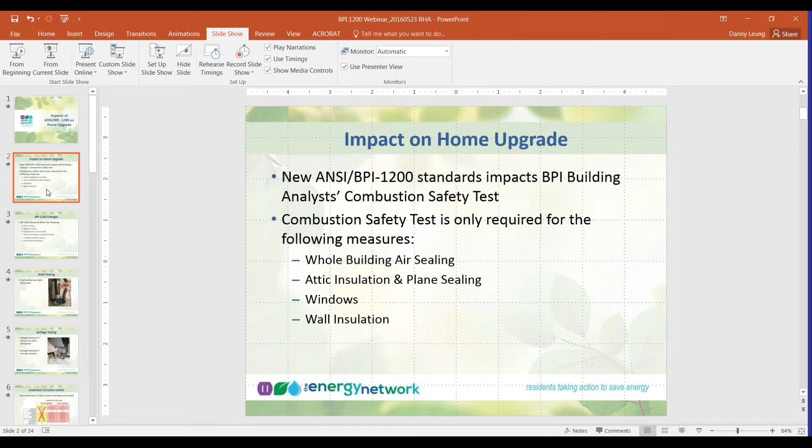So, to get started, the new ANSI/BPI 1200 standards came into effect this year. The standards really only impact the BPI building analyst combustion safety test, and as you know, our program is based off of testing by measure.

Basically, in our program, combustion safety testing from a BPI building analyst is only required when applying for whole building air sealing, attic insulation and plane sealing, windows, and wall insulation. So if you do any of these measures, this is when these standards take effect.

If you do anything like an HVAC replacement only, these standards won't affect your testing, because you're not required to do combustion safety testing when you do an HVAC replacement.

So I guess right now I will hand it off to Neil, and he will go over all the changes.

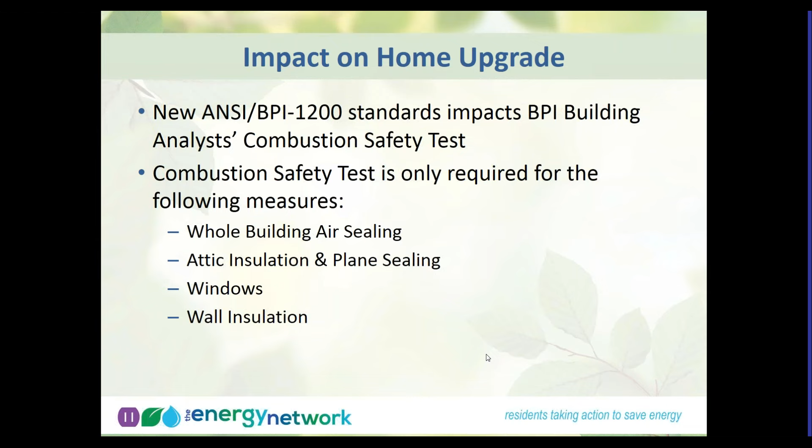As you know, BPI 1200 became effective in January of this year, and the program is now finalizing our adoption of those standards. And as Danny said, this coordinates with the test-by-measure features of the program.

When those combustion safety changes take effect, these are the tests actually affected by BPI 1200: draft testing, spillage, undiluted carbon monoxide action levels change, and worst case depressurization testing actually goes away. We'll go over each of these individually. Fireplace damper clamps are now required, and today we're going to spend most of our time on new mechanical ventilation calculations.

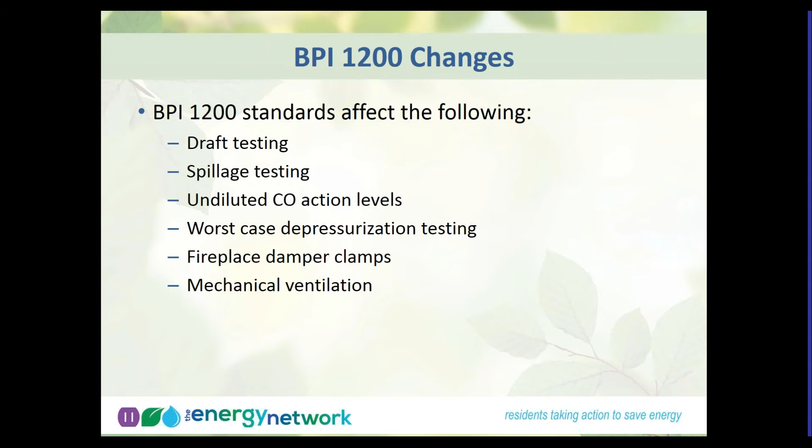Draft testing has been eliminated in the 1200 standards. We're not seeing a lot of draft testing in the field now due to the prevalence of direct vent appliances and B vents, and there's been some lack of clarity on drilling or not drilling B vents. So draft testing has been eliminated, and the standards really rely on spillage testing to adequately test whether appliances are venting properly.

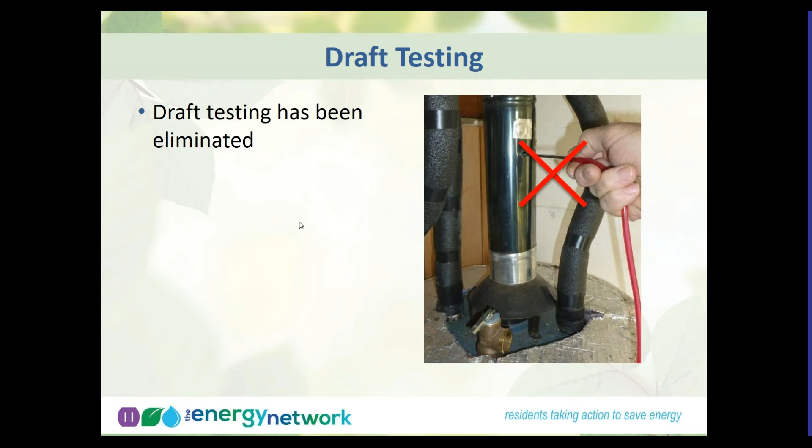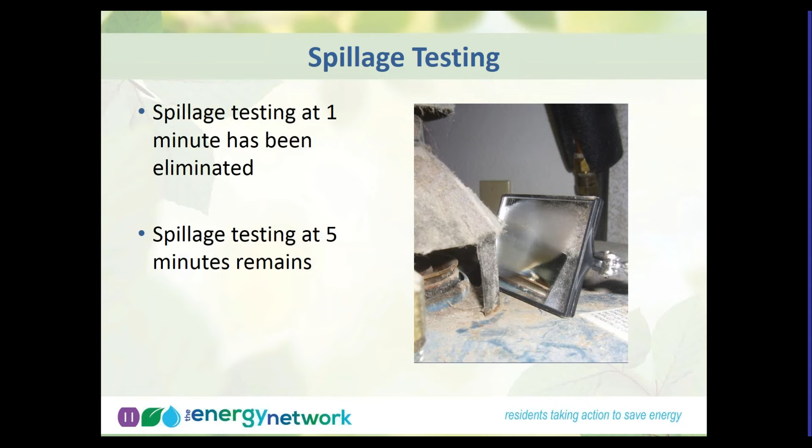Spillage testing at 1 minute has been eliminated. The program is adopting the standard for 5 minutes. It's more of a steady state test for the appliance, and simplifies matters a little bit out in the field, eliminating the 1 minute test.

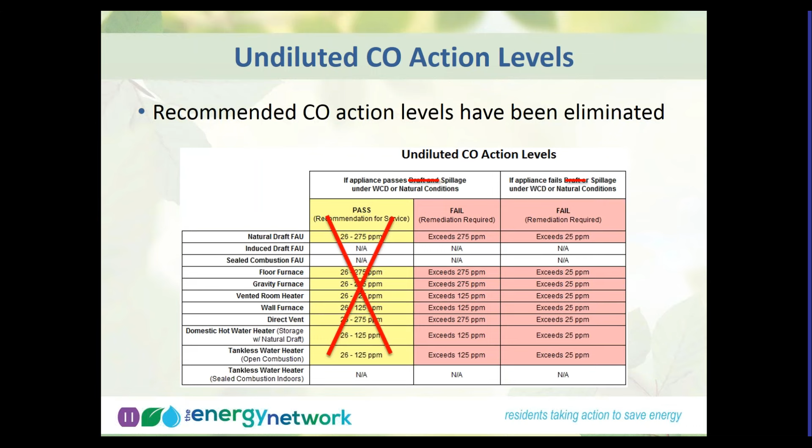For undiluted carbon monoxide action levels, the recommended action levels have been eliminated. These action levels used to be based on whether draft and/or spillage failed or passed under worst case or natural conditions. Now that we're not testing for draft, these action levels take effect based on spillage only. As you can see from this chart, the actual action levels themselves have not changed, it's just the recommendation for service that has gone away.

Worst case depressurization limits and worst case depressurization testing have also been eliminated. They found, I think in a Lawrence Berkeley lab study, that these limits were somewhat arbitrary for different types of appliances in different conditions, so they did away with the limits altogether. Again, spillage is the important test here to tell if an appliance is adequately venting.

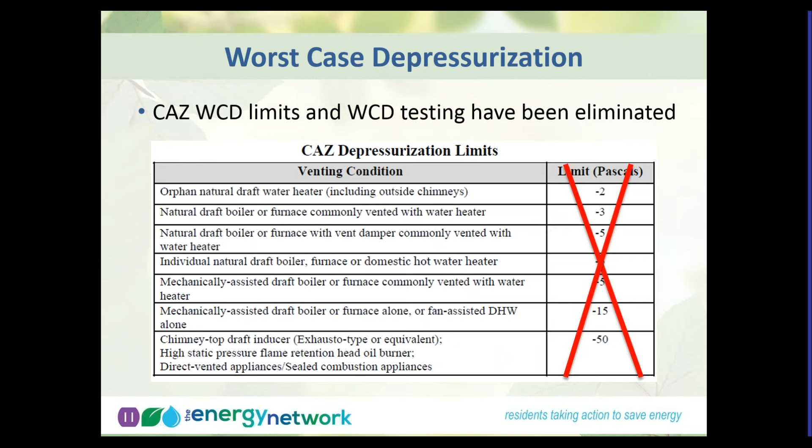It's important to note that worst case depressurization setup is still required for open combustion appliances, required for appliance ambient carbon monoxide testing, and required for undiluted carbon monoxide testing. The worst case depressurization limits and tests have gone away, but the setup is still required for these other tests.

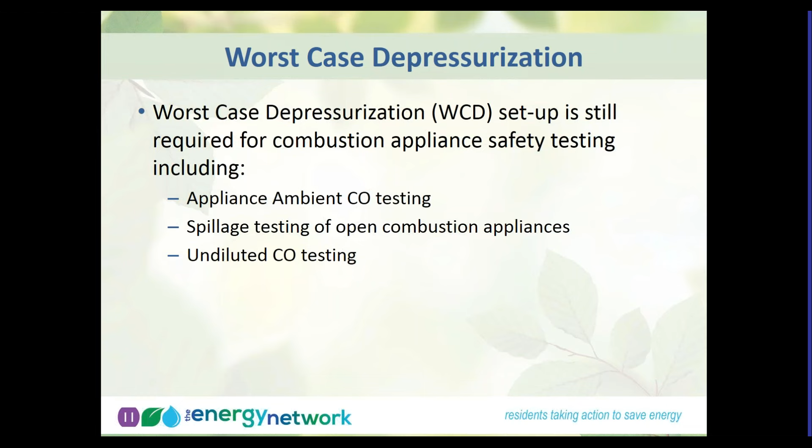This is a new rule that's come into effect with the standards, and it requires the installation of fireplace damper clamps on gas inserts and fireplaces. These are for gas fireplaces and gas-fueled appliances only, and it's an indoor air quality and safety measure, preventing the accidental use of one of these appliances with the damper fully closed.

Did we skip a slide here, Danny? Sorry.

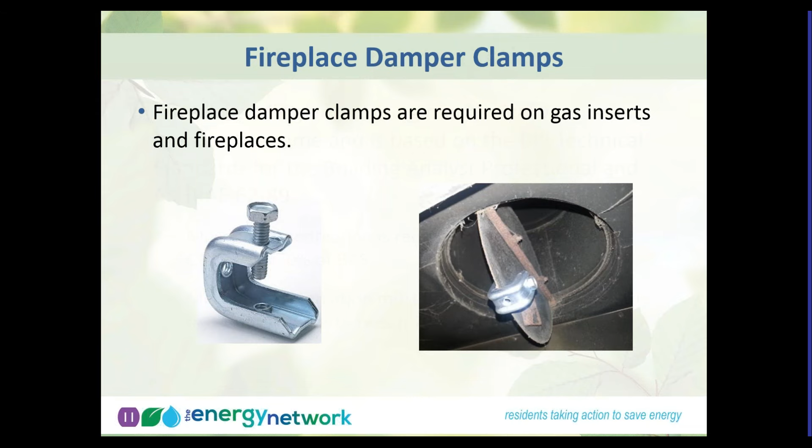Most of the rest of the time this morning is going to be spent on mechanical ventilation. The trigger for mechanical ventilation remains the same as in the old BPI standard, where a blower door test result less than 70% of BAS triggers the requirement for installed mechanical ventilation. The recommendation for installation happens when the blower door test result is between 70% and 100% of BAS. This is the ASHRAE 62-89 standard.

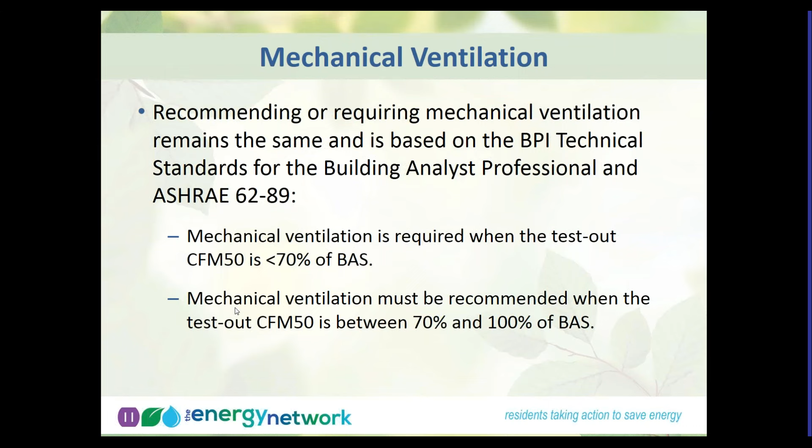The actual calculation of the amount of mechanical ventilation required for a house is based on ASHRAE 62.2-2013, and that's where some of the complications come in. 62.2-2013 has a series of calculations that are a bit complicated, but the program is providing a calculator that allows you to just enter a few numbers, a few more than you were doing previously with the 62-89 standard. I'd like to review what those calculations are based on, and then we'll do a review of the calculator.

This calculator is necessary for anyone who's doing whole building air sealing. It's going to be a required document to be submitted with your other documents.

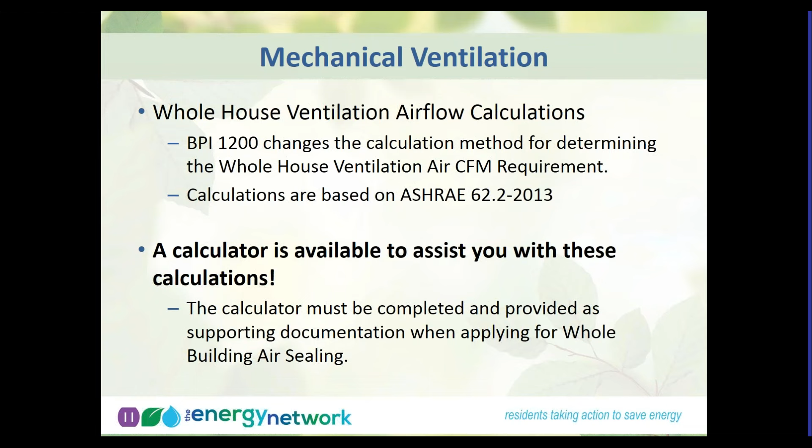Basically, there are three calculations to come up with the airflow required for a home. The first, initial ventilation airflow, is based on conditioned floor area, number of bedrooms, and number of occupants. It's kind of similar to the previous calculation. There's also a local exhaust adjustment - local exhaust meaning the existing local exhaust relating to kitchen exhaust and bathroom exhaust.

We'll go over that individually in just a moment. That's based on the number of kitchens and full bathrooms in the house, as well as the operable windows in those kitchens and bathrooms, and it's based on what the existing mechanical ventilation airflow is if fans are already installed.

There is a credit for infiltration. If a house is very leaky, obviously less mechanical ventilation is going to be required. That infiltration credit is also based on the number of stories in a home and the geographic location of the house.

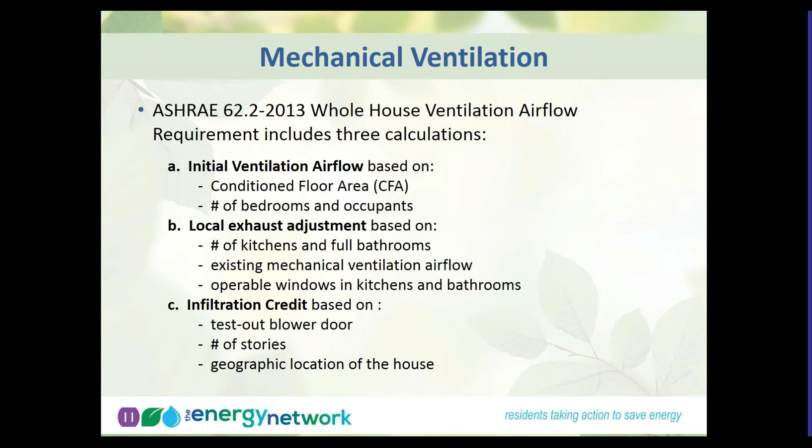So individually on these calculations - it's very slow to advance - that initial ventilation airflow, the first calculation I mentioned, these are the numbers. You don't really need to know these numbers, as the calculator is going to do this for you. We're looking at conditioned floor area, the number of bedrooms, and the number of occupants.

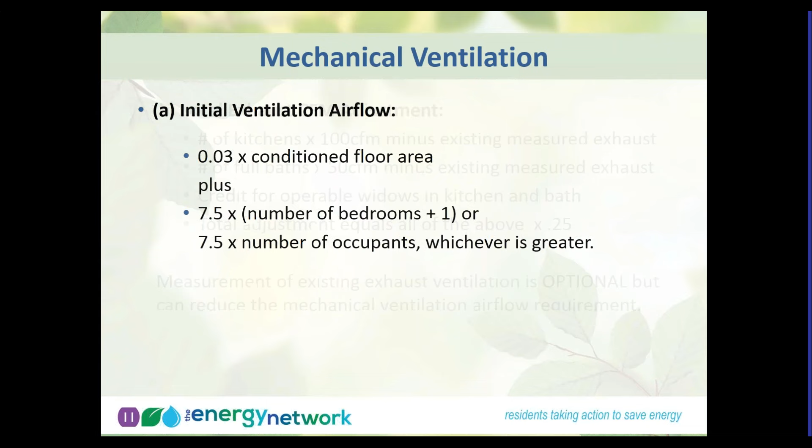The local exhaust airflow adjustment looks at kitchens and full baths - full bath meaning the bathroom has to have a shower or a tub. ASHRAE 62.2-2013 requires that a kitchen has 100 CFM of exhaust and a bath has 50 CFM of exhaust. As I mentioned, you get credit for an operable window. There's another factor built into the calculator that takes a quarter of that required amount and adds it to your initial airflow requirement.

The existing ventilation in a home - if there are existing kitchen fans and bath fans, and you have the ability to measure the airflow in those fans - that can reduce the required whole house mechanical ventilation that is required to be installed. If you don't measure those, you can still use the calculator and proceed, but your required airflow may be a bit higher.

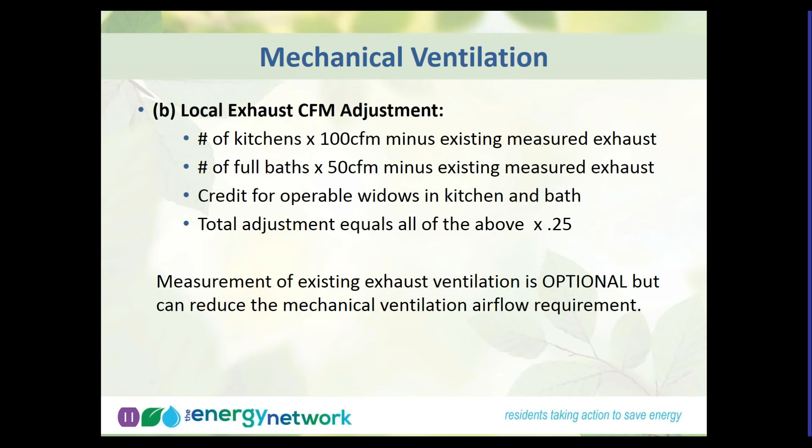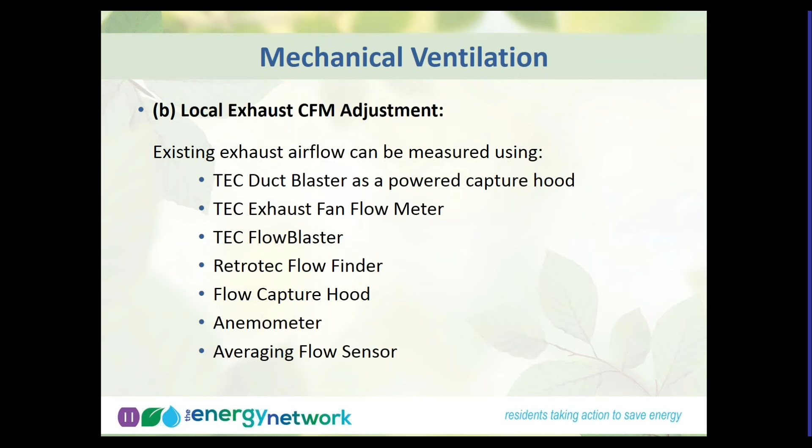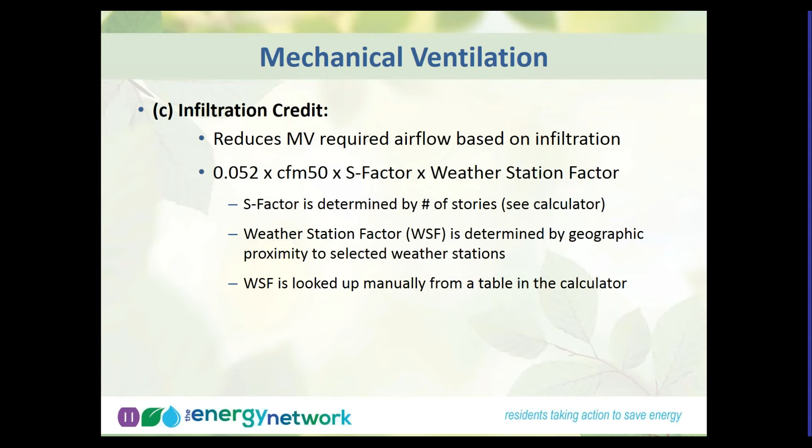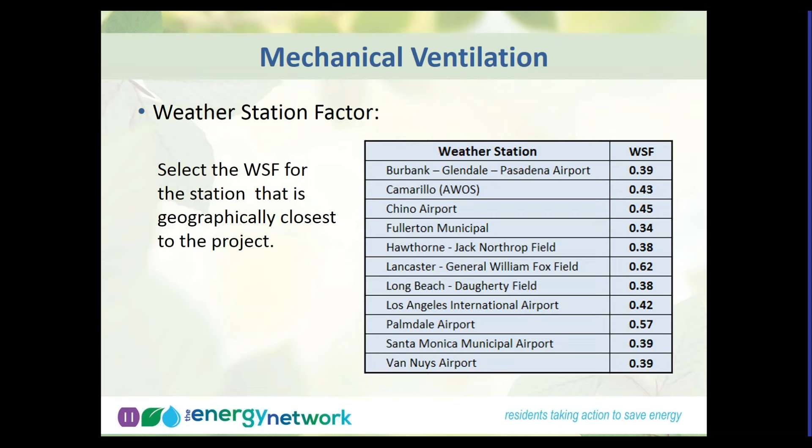The last bit of this calculation is an infiltration credit. As I mentioned, a very leaky home is going to reduce the amount of airflow required for mechanical ventilation. There's a couple of constants and factors in here. One of them is called the weather station factor - you need to identify the location of the weather station geographically closest to your project, and use the weather station factor associated with that station. There are about 10 or 12 weather stations in LA County.

So, the calculator. This tool is hopefully going to simplify mechanical ventilation calculations for everyone. There are two main parts, or two main steps. Step one is a calculation you've already been using in the previous standard, essentially using the age of the home, the number of stories, average ceiling height, conditioned floor area, number of bedrooms, number of occupants, and the blower door test number. This will tell you, down in the bottom portion of the calculator, whether mechanical ventilation is required, recommended, or neither.

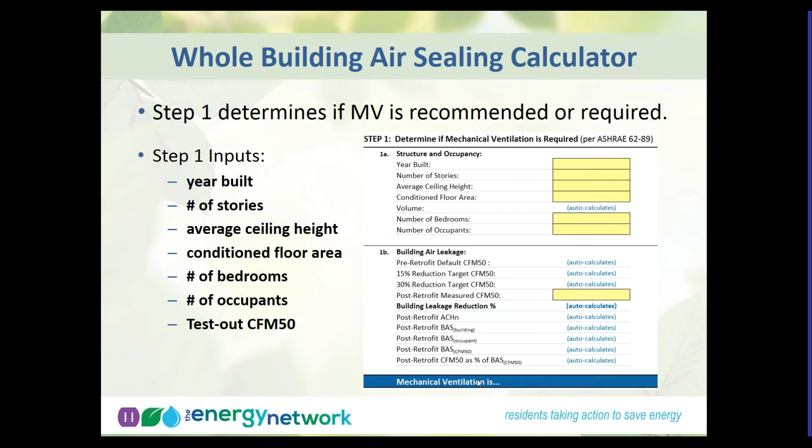So on the next slide, these are just some sample numbers from a project. And as you can see, with the CFM 50 being 69% of BAS, mechanical ventilation is required.

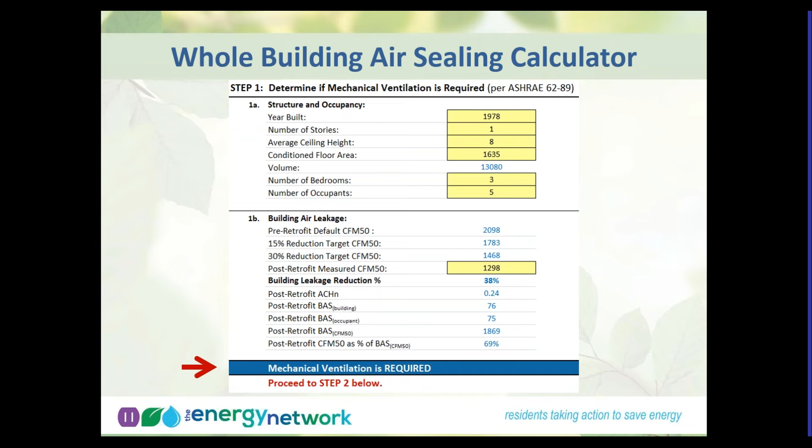That takes you to the next step, which is the 62.2-2013 portion of the calculation. In the calculator, all of the data that you've entered from the first step is forwarded into this part of the calculator. So in these yellow boxes are the only places you need to enter information.

In this section here in the middle, you would enter the location of the existing fans, either a bathroom or a kitchen. You'd enter measured airflow if you chose to measure that airflow, and you would indicate whether each bathroom or kitchen had an operable window. Those adjustments are all automatically calculated.

The only other piece of information you need to add to the calculator here is the weather station factor that we showed you a couple of slides ago. That one is a manual lookup. The weather station, you'll have to use some sort of map online or a physical map to indicate what weather station is closest to your project.

What you get at the end of this calculator is a whole house mechanical ventilation continuous airflow requirement. That's going to be a CFM number that gives you an indication of the size of the whole house fan that would be required in the home. And the key piece here is that is a continuous airflow requirement.

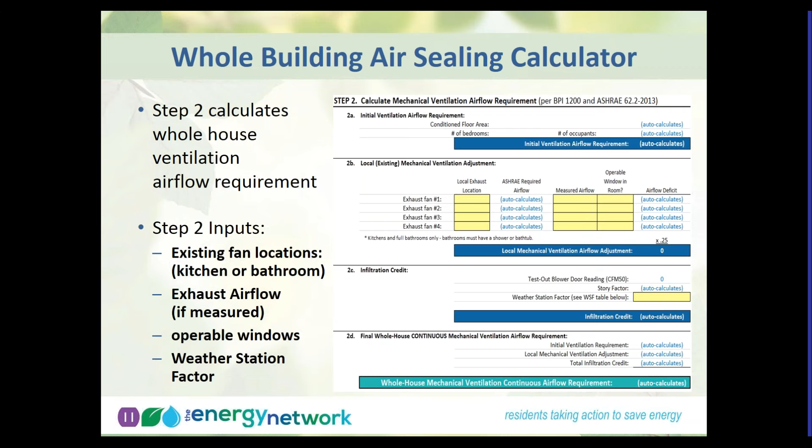There is an option for using an intermittent fan, and we'll talk about that next. Here's step 2. Let's go back one slide, Danny. Here's that same step 2 of the mechanical air ventilation airflow requirement calculation filled out with information.

As you can see in the middle, in this particular project, the airflow was measured, was not measured for the kitchen, and there was an operable window in the room. As I mentioned before, the required airflow for a kitchen is 100 CFM. Because there was an operable window in the kitchen, there was a 20 CFM credit. That means there was an airflow deficit of 80 CFM.

In the bathroom, the first bathroom, the contractor measured the airflow through the bathroom ventilation fan. There was no operable window, and that means there's an airflow deficit of 15 CFM. As you can see, the calculator is coming up with the answers for all of these. You just need to put in the data that you have in the yellow boxes, and the calculator will do the rest.

In this case, the whole house mechanical ventilation airflow requirement was 95 CFM. But we can foresee that some customers may not want continuous mechanical ventilation, meaning on 24 hours a day.

There are provisions for reducing the amount of time that mechanical ventilation would be on, but that requires a greater CFM rated fan, and there are certain rules about how often this ventilation needs to operate.

The controller that is programmed to operate the fan has to cycle on at least 1 hour every 3 hours, which means that there's a minimum 8 hours per day that whole house mechanical ventilation needs to operate.

Again, this calculator just shows all you need to enter is the desired number of hours per day that the ventilation will operate, and the end calculation here will show you the size of the fan that is required for that. So this calculator, Danny, will be distributed by the program, and hopefully it will be an easy tool for you to use out in the field.